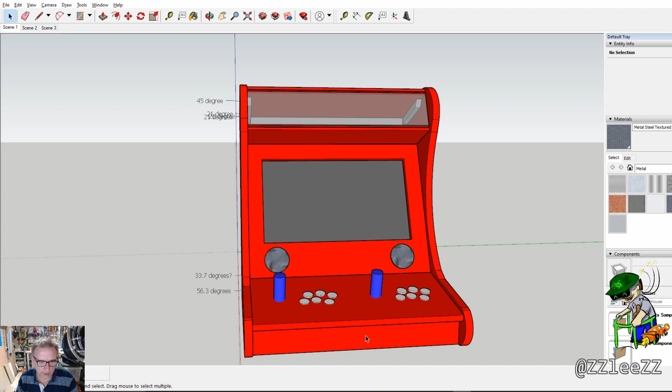There's some buttons to go on the front here, start and select for each player, and USB ports in the front here for player 3 and player 4.

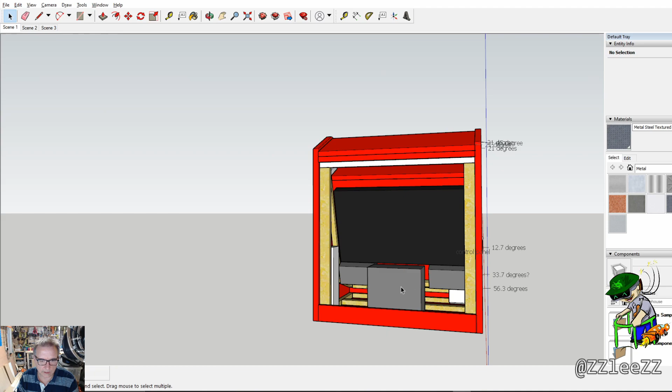I think this is mostly the plan finished. I can show you the inside. We've got two access points, one is the back door, so we hide that one. You can see the bass speaker and the two speakers either side there.

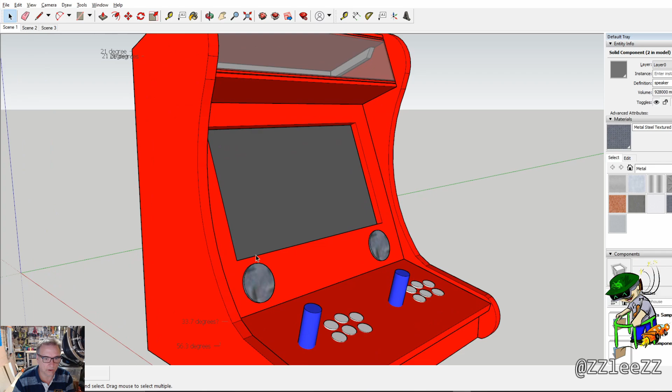I'm still not sure whether to mount the speakers inside the marquee facing down. There's going to be gold trim T-moulding, brass effect polished brass T-moulding, with a candy apple red automotive finish. The speaker grills he's just ordered are going to be gold too, a brushed gold, so they'll match, but I don't know if they might be too obtrusive and better up there. We'll see, we'll have a look at that.

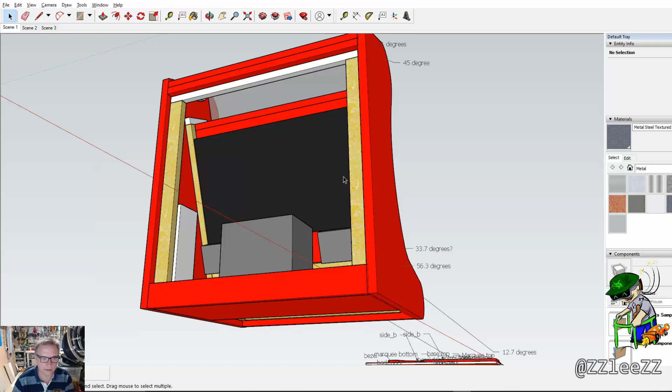So here's the power strip inside. We've also got access underneath for the controls, so you can troubleshoot wiring without having to stretch through the back there. The back door and the underside door are going to be held in place with coach bolts.

There'll be rubber feet on here, two of them will actually be on the underside door.

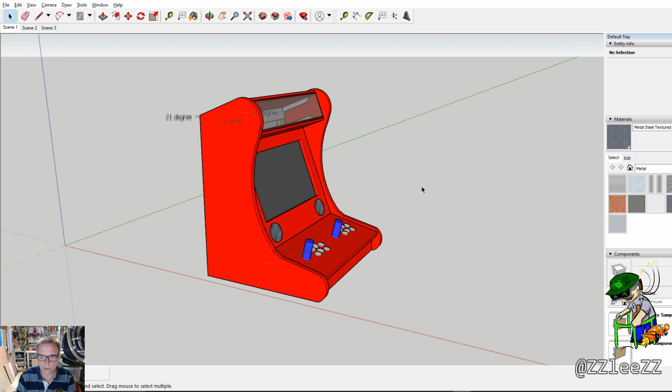Cutting the side panels first. Both panels are going to be cut from this one piece of MDF.

So I started trying to transfer the plan from SketchUp using measurements onto the piece of wood, and this didn't go so well. I did it before on a previous build, and it did take a long time then, and I thought I wouldn't do it again now.

Instead what I did was just found out how to print out the plan from SketchUp full size onto A4 sheets of paper, and then cut them out because the printer doesn't do borderless printing on plain paper, and then stuck them to the MDF.